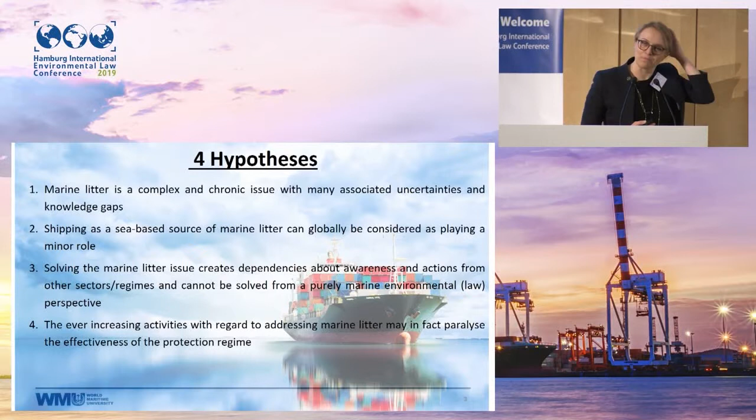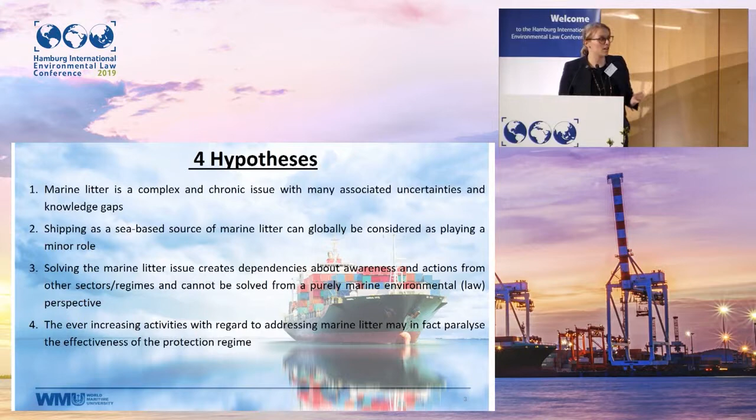I also like to argue—I'm happy that my former boss of the German Environment Agency is not here—that the amount of focus right now on marine debris has the potential to actually paralyze the effectiveness of the regime. I will talk about that in the course of my presentation.

For the purpose now, I would like to use a very old school UNEP definition of what we understand marine debris to be: any persistent, manufactured or processed solid material discarded, disposed of, or abandoned in the marine and coastal environment. There are different versions of it, but I'll use it as is. So it has to be something solid, and 80% of marine debris that we find is plastic, so this is the major focus as well.

Setting the scene: we usually say that 80% of marine debris comes from land-based sources, 20% from sea-based sources. There are some fights in the scientific community, but I'll leave it as is. Here in the North Sea, around Hamburg, we know that this ratio is actually the opposite—20% comes from land-based and 80% from fishing and shipping. This is proven by monitoring activities.

We know that right now we have 311 million metric tons of plastic produced each year—that figure is from 2015. There are a lot of leakages in this system, so the plastic we find in the ocean is associated with our consumption and production patterns. We know that by 2050, this amount will be at least 3.5 times as much. That's why we need to address this issue not in a piecemeal, sub-threshold way—we need systematic changes when we want to make a difference to this problem.

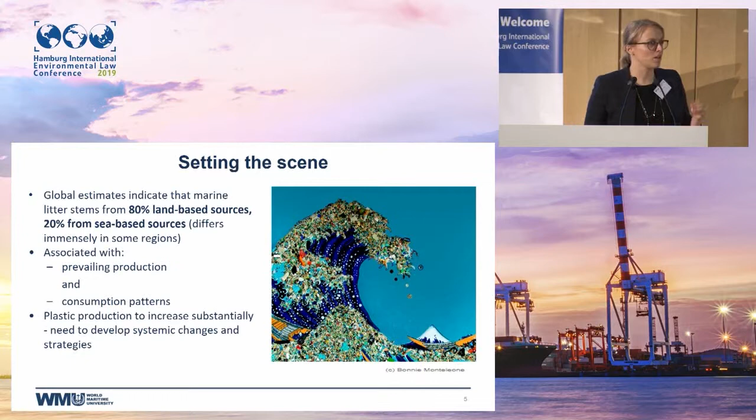Dealing with litter is on vogue. Every time I say I work with marine litter, I can literally see the eyes rolling in their heads—'not one of those again.' And I understand it. Marine litter is one of the few substances in the 2030 Agenda for Sustainable Development that's explicitly mentioned. There could be chemicals, whatever, but no, it's marine debris.

And in the recently concluded United Nations Environmental Assembly in Kenya, of the 22 resolutions dealing with substance, with content, 10 of them dealt with plastic in the environment.

I think, to be honest, I like this topic, but it's a lot. And who can even read all of them? I mean, it's quite a lot.

So just coming back to focus my presentation a bit, there are 3 major sources of marine debris when we look at sea-based sources. One is shipping, so operational waste, cargo.

The second one is fisheries: ghost nets that are lost, discarded, abandoned in the environment, aquaculture, dolly ropes—those things that protect the nets—they lose some fibers.

And the third one is dumping. Even though the dumping regime is quite advanced with regard to plastics, there are several pathways. For example, the sewage we bring out into the sea contains microfibers from our washing and personal hygiene activities. This is an important pathway, but I will not address it today.

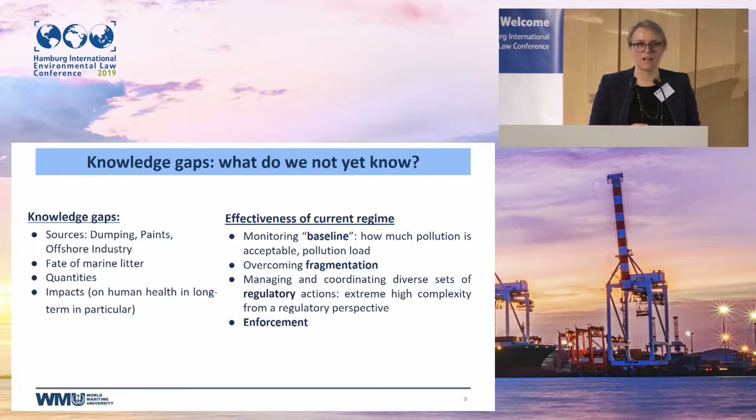Overcoming fragmentation is a theme we've had so far. It's inherent in UNCLOS that we have a very separate approach to different sources of pollution, and this is why it's hindering effective solutions for this problem. Then, of course, managing the diverse set of stakeholders: waste management, tourism, fisheries, chemical people, just normal people—it's quite complex. And enforcement, which we also learned. How do you figure out that a ship crew threw bags of plastic overboard if there are several thousand on the way? And I love when people say marine debris is an emerging regime. I like that because it's not.

I'm not a graphic designer, so please excuse me. With Professor Schierkop and Ringbom, you have more beautiful timelines, but this is just an outline of when we first had an understanding that marine debris is an issue. In the 1960s, the United States government already outlined that it could be a problem. Then in the 70s, the London Convention dealing with dumping, which also covered plastic, started outlining this as an issue. Then we have the CBD, some work on plastic, the Rio Declaration, and the MARPOL Convention dealing with garbage, adopted in the 1980s, which explicitly deals with garbage. So there must have been an awareness that this issue is an issue.

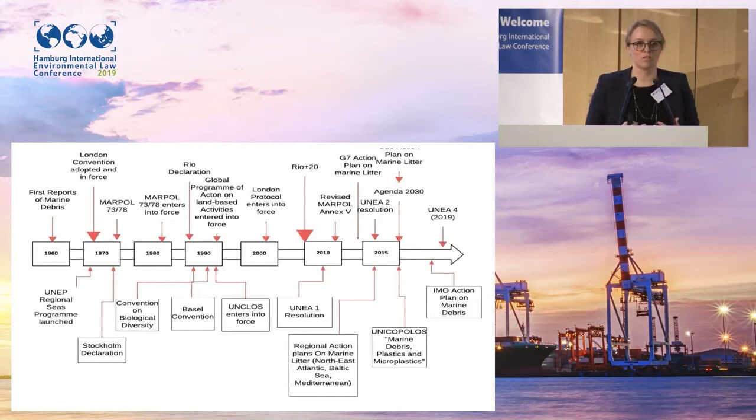And it's mind-boggling why it's taken us such a long time, and we still haven't moved further in effectiveness or in the protection regime. So we know there's awareness, we know it has impacts, and my question is: why has nothing changed? I would like to outline now the legal framework, and I say that with regard to shipping, a lot of things have already changed.

The fundamental approach, if we look at waste from shipping, is Annex 5 of the MARPOL Convention. It's an optional annex, meaning states have to ratify it outside of the normal annexes associated with MARPOL. It's a very successful annex: 153 countries have ratified it, covering 99.38% of the world's gross tonnage. So there's a lot of willingness, at least to comply.

In 2011, this annex was revised, so it's quite a new starting point for shipping. I'll quickly outline the five pillars on which MARPOL Annex 5 is based—essentially the pillars of the protection regime we're looking at with marine debris. The first and most important one is the discharge standard.

Overall, the new revised MARPOL Annex 5 has a general discharge prohibition, which is great. It also includes a definition of plastics, garbage overall, and fishing gear, which is quite exciting. So there's no excuse anymore to say, 'Oh, I didn't know if this was plastic or garbage'—that's quite great.

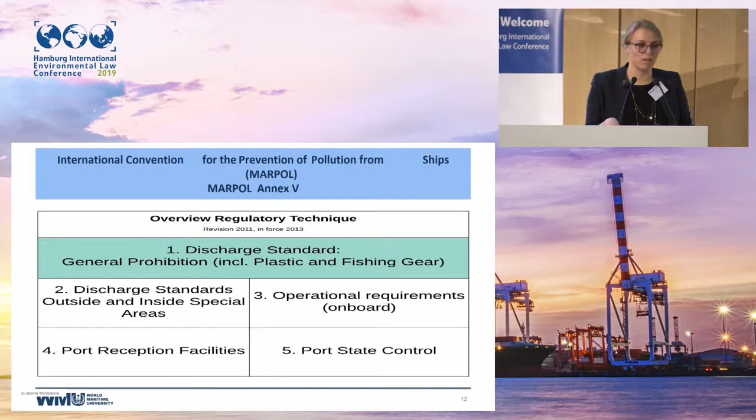Then the operational requirements: the crew on board need a dedicated garbage storage place, an operational board, and information on what can be thrown out. And the fifth pillar is port state control—we learned about that yesterday, that's about enforcement. There are provisions for how MARPOL Annex 5 can be enforced.

Coming now to more specific issues: it's very positive that the new MARPOL Annex 5 now has a definition of garbage, including plastic and fishing gear. What I love is that fishing gear is now included in MARPOL Annex 5—that's quite unusual, given that fishing is usually regulated by the FAO.

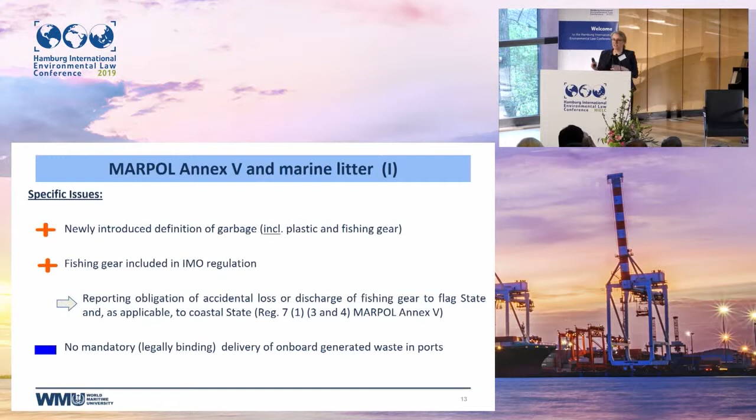I think it's quite an ingenious hack to somehow create an obligation to report lost fishing gear to the flag state, or the coastal state if you lost it there. However, can anyone guess how much fishing gear loss has been reported so far?

No, unfortunately not one. So let me put it this way: it's not very successful in that way. So things have to change, maybe.

Something very negative, I would say, is that there is no legally binding obligation to deliver the waste in the port. It's part of the MEPC guideline, but it's not legally binding. It doesn't say it from the outset. This is something where I would have argued differently.

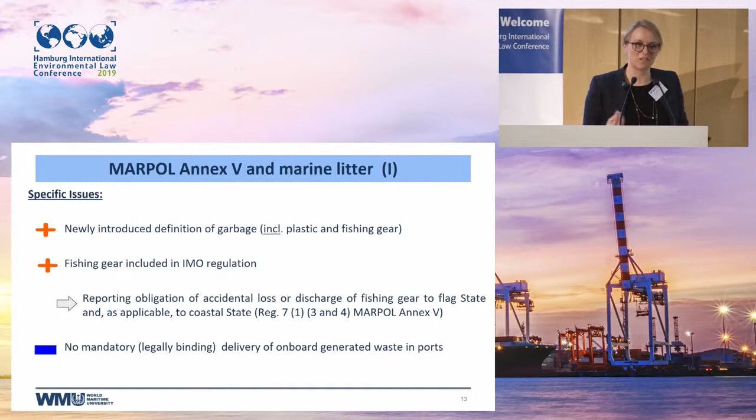Now, coming to the adequacy of port reception facilities, like I said, it's a very important element of MARPOL Annex 5. It says that adequate means that the facilities can receive all the waste of the vessels that usually call on these ports, and the second thing is without undue delay.

And this is where it comes back from Professor Schierkopf's outline with regard to just in time. The crews do not want to waste time waiting for maybe a truck to receive their waste. It's a really important aspect.

I would argue that the definition and the guidelines that have been developed at IMO are too vague, and they are actually really a weakness in the regime.

The second one is that I see it as yin and yang. Professor Schirkow said it as well, port and ships. So far, MARPOL Annex 5 has always been quite focused on the obligation for ships. However, they have to have garbage management plans and so forth, but the same doesn't apply to ports.

So there have been some stories from crew members where they had separated the waste on the ship, but then they went to the port and they just had to throw it into one big container. So this is really undermining the efforts that are done on board.

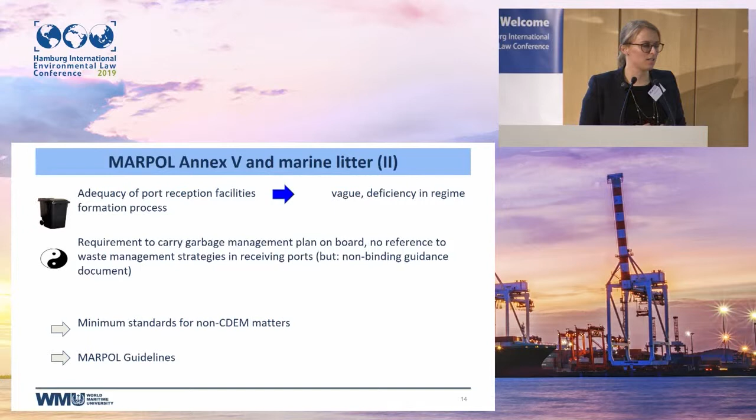And there are some MARPOL guidelines that further substantiate it, but they really do not give a lot of concrete guidance. And luckily, the MARPOL Annex 5 standards are minimum standards, and the obligations can be further substantiated.

So from the eastern part, Kiel is, for example, a city that's bordering the Baltic Sea. This is a special area under MARPOL Annex 5, so it means it's already understood that this area needs more protection. And the Helsinki Convention contracting states have a really pioneering role in addressing ship-based waste.

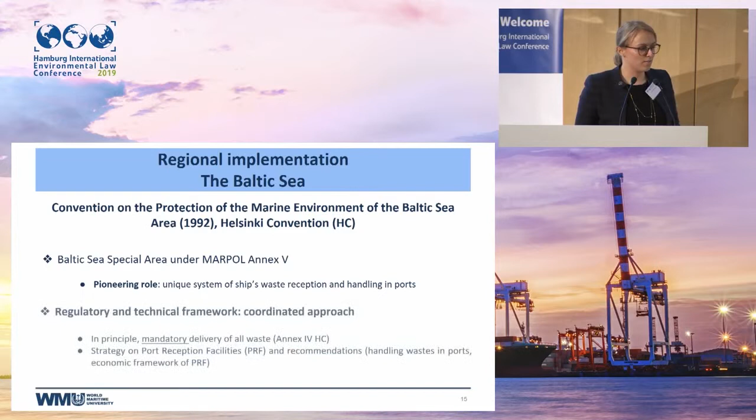They have done it through a coordinated approach. There's a mandatory delivery of waste in ports, and it's legally binding. They have also developed strategies on port reception facilities, how to organize it with costs, and most prominently, they have developed the no special fee system.

And Mrs. Reiling talked about it yesterday. It's the flat fee, the indirect fee, meaning that you can deliver your waste free of charge, and it's included in the harbor fee. There are, of course, associated aspects to this.

First of all, it's an economic incentive, and the idea is to harmonize it in the Baltic Sea and in the North Sea as well. Some ports do that already in the North Sea and the Baltic Sea. It's quite a successful element.

And there are some further definitions. For example, if there's green ship criteria, it could in theory be applied. So you could have a green ship that comes into the port with maybe waste management in place, but there is no certificate, there is no standard yet, so it's really difficult to know what we understand, or what the port administration should understand, as a green ship.

And of course, the role of the polluter pays principle and cost recovery in this aspect is quite difficult, because the ship is a polluter in that they produce waste, they bring it to the port, and they can get rid of it for free in a way, because they don't have to pay directly for it. So there needs to be some more work done on how to substantiate that.

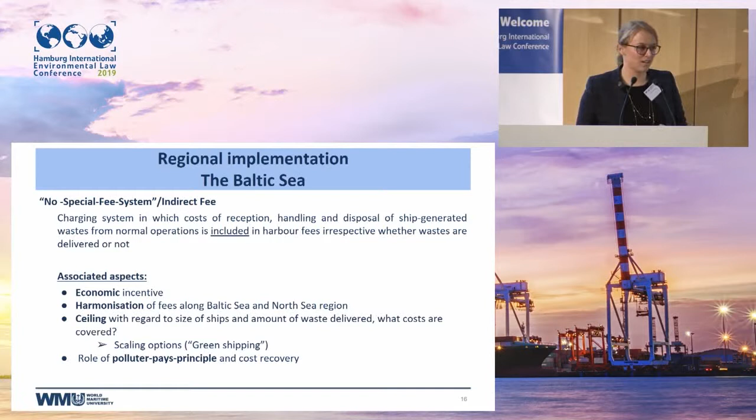And I think that in the EU there's a lot of work being undertaken with the adoption, hopefully next week, of the new PRF directive. And now we come to enforcement. So we just had the incentive approach from the Helsinki Convention, and now we have the enforcement.

Before I joined the WMU, I worked for the German Environment Agency, and we organized the OSPAR-HELCOM workshop on sanctions and fines of infringements with MARPOL Annex 5.

We had port state control officers, waterways police, port authorities, and ship owners there, and we all discussed these kinds of things. Overall, the challenge is that it's very difficult to detect plastics. How do you detect it compared with oil? With oil you can at least have an aerial overview, you can see it.

But with plastic, you cannot do it. It's sub-threshold. A bag of plastic maybe doesn't kill someone or a bird, but in the cumulative effect, it's really heavy.

Then the port state control officers, or the waterway police here in Hamburg, said they go on the vessel and have to check ILO standards, SOLAS standards. They are inundated with the pressure. We go on there, and even though we'd like to look at plastic, it's the least concern if we know these people on board are not safe, because there are some really big issues on board, and we need more training on this.

There's also a lot of different communication between port inspectors and port authorities, so this is an area of research that has to be more undertaken.

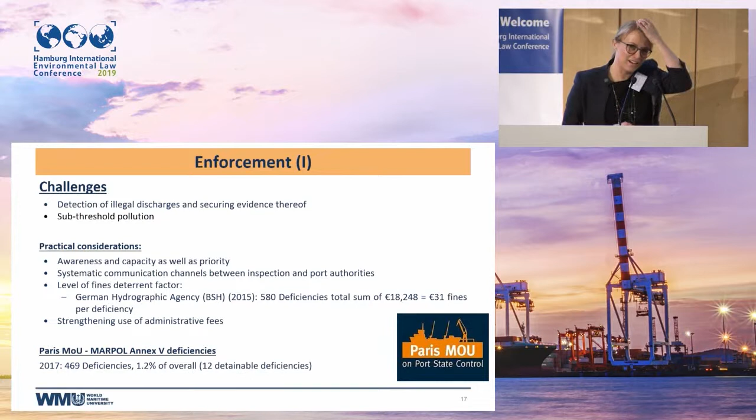There's something else I'd like to talk about. It's been mentioned quite a lot in the different work on marine debris: why don't we just have really heavy fines for those people who infringe MARPOL Annex 5 obligations?

I'm sorry, I just took the German Hydrographic Agency's information. It's not that Germany is the only country with these numbers, but it's just really readily available.

So in 2015, 580 deficiencies with regard to MARPOL Annex 5 were found, and a total sum of 18,248 euros were fined. I did a little calculation - that's 31 euros per fine. So I'm not so sure whether this is actually a deterrent or not.

Like I said, it's not only Germany - other countries don't even disclose this information. I don't want to discredit my home country, but I just wanted to outline that maybe something has to be done in this regard.

This leads maybe to a research question of whether administrative fees would be more interesting in moving forward with this.

Then the Paris MOU - this is what Ms. Reiling already talked about yesterday as well. They had 469 deficiencies. Out of them, 12 were detainable deficiencies, so they were considered heavy enough to detain a ship. That's quite interesting, actually.

Because I like to do these kinds of things, I looked at the Paris MOU publication 'Caught in the Net.' It's not a very strict thing - port state control inspectors write comments that are a little comical, really funny sometimes, about ships. They really made an impression because their deficiencies and mistakes were so high. This is a ship, Fetisal, from Congo, flying the flag of Congo, that was detained in Greece in 2016.

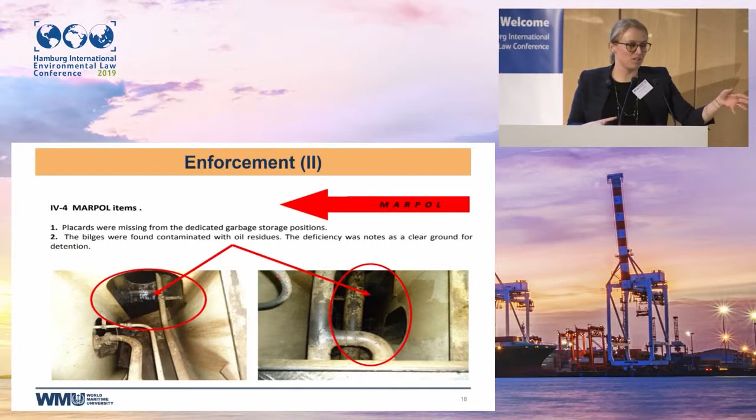Because there was no picture for that one, I went to a different example, and I found this. Imagine this is on your deck, and there's wind, storm, water, whatever - then of course these things fly overboard. This is one example of what could be a deficiency. I'm not sure if that could be a reason to detain a ship, but it's an example just to clarify what an infringement could look like.

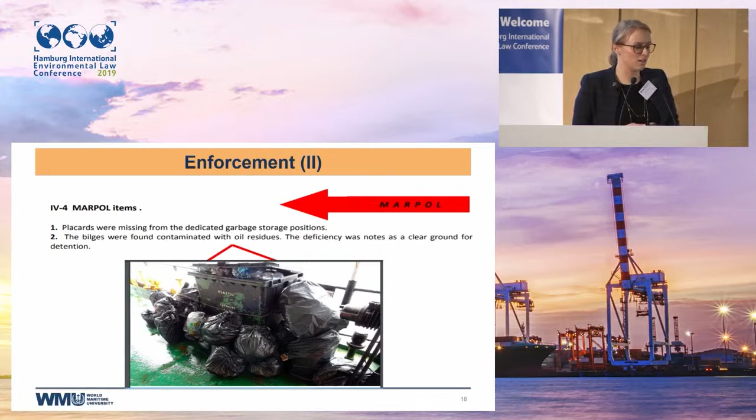So I've discussed that we have many different aspects with regard to sources of marine debris, and the regional seas agreements in the Baltic Sea and North Sea Atlantic - the OSPAR Convention and the Helsinki Convention - are front runners in this.

They have adopted regional action plans on marine debris that are all based on 4 pillars: land-based action, sea-based action, cleanup efforts, and awareness raising. They have all addressed the issue of sea-based sources, and have harmonized PRF systems, really trying to push that forward now. They look at enforcement, best practice in the fishing industry, and fines for littering at sea.

So this is something that they are pushing as well in their own little means, but it's of course only within the marine environmental protection community.

To make it a bit more complicated, we have the G7 and G20 action plans on marine debris, both developed by Germany and modeled after the Helsinki and OSPAR Regional Sea Action Plan. This one is from 2015, the G7 German Action Plan on marine debris, and then we have the G20 Action Plan on marine debris. So yet another action plan and more information. To make it worse, the Italian presidency picked up on this, and the Japanese presidency picked up on this, and I know that the G20 presidency in Japan will pick up on marine debris again. So we'll have yet another layer of information and actions coming our way.

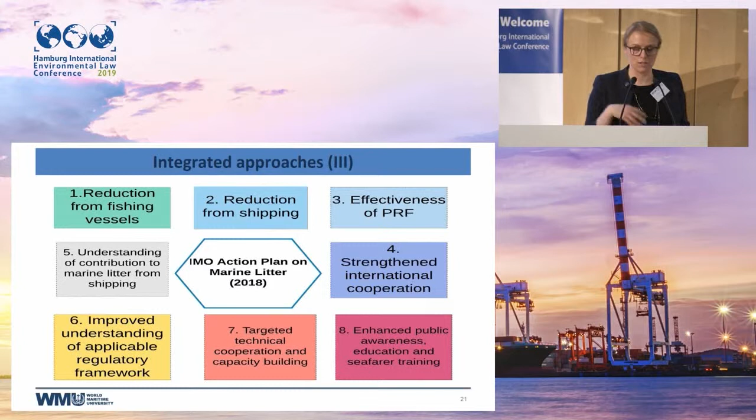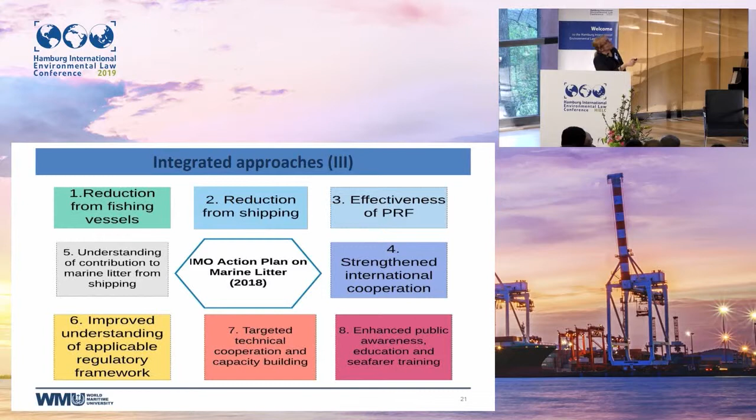I would like to now talk quickly about the regulatory framework, because there are some lawyers in the room, I heard, and also the effectiveness of PRF. The wording is relatively quite weak, but there are now efforts underway to work further on how to strengthen the role of ports in separation of waste, and also how to enhance enforcement of MARPOL Annex V, and the cost framework associated with port reception facilities.

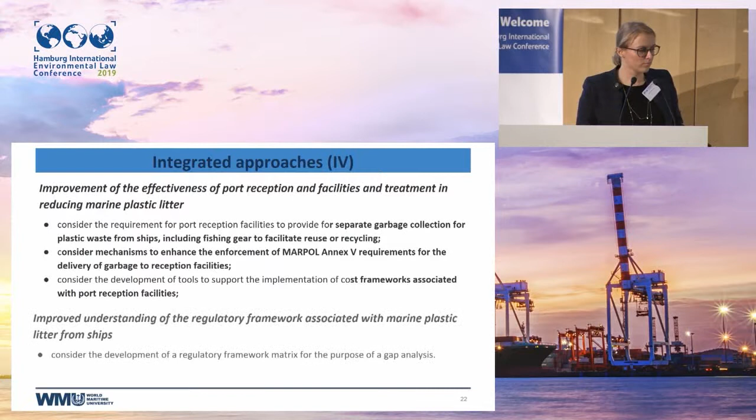So really working on the lines of how do we subsidize, how do we compensate the waste that can be landed for free in the harbor. And then the last one I'd like to mention is there will be work coming up that will develop a regulatory framework matrix for the purpose of a gap analysis.

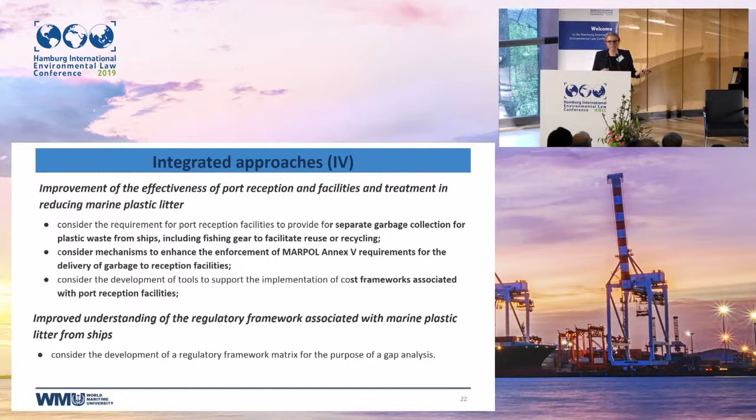If you ask me, there is already enough understanding of what the gaps are, but I think it's a good first step also for the legal research community to move forward and to give some substantiation, for example from administrative law. These kind of different aspects have to be involved.

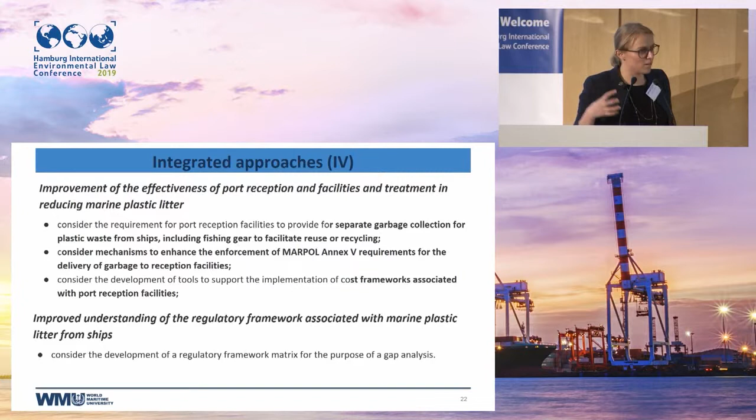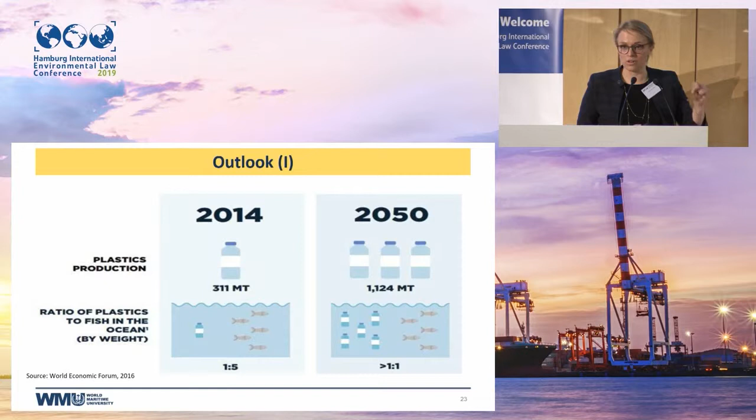Just a short outlook. The World Economic Forum has outlined that by 2050 we'll have the same amount of plastic as fish in the oceans, if we continue with business as usual. So it means we need to start doing something. And there are 5 main areas where I think things will move forward.

First of all, marine debris in the new agreement addressing biodiversity beyond national jurisdiction. In the IGC that just ended this week, there were at least 12 states that explicitly mentioned marine debris. They talked about pollution, but they meant marine debris. So it's already high on the agenda there.

Then we know that marine pollution is a reverse tragedy of the commons. We do not take something out, we throw a lot of things in. And what this does to our commons, we'll have to see about that.

Then addressing the issue with plastics, Germany and other countries are pushing hard towards the International Convention on Plastics that would address the entire global value chain of plastics. It has not been very successful, I would say, but I guess shipping has to be part of this one. This will be coming ahead as well.

And the role of the IMO and the green shipping concept, or the move towards zero emission with regard to garbage, this is something where IMO will have to work a lot as well. And then, of course, the regulatory framework relating to cleanup efforts, liability and compensation of damages relating to marine debris will be part of the work as well.

Just to conclude, shipping has relatively high protection standards with regard to marine litter, but further substantiation is needed, and we know that enforcement must be strengthened. But I would argue that the role of incentives, and really trying to make a business case out of it, giving waste a value, this is the way forward. There's a lot of research to be done, both from the legal community but also from other fields. And the responsibility of states to address the global value chain will probably be the way forward when we want to talk about it. Thank you very much.